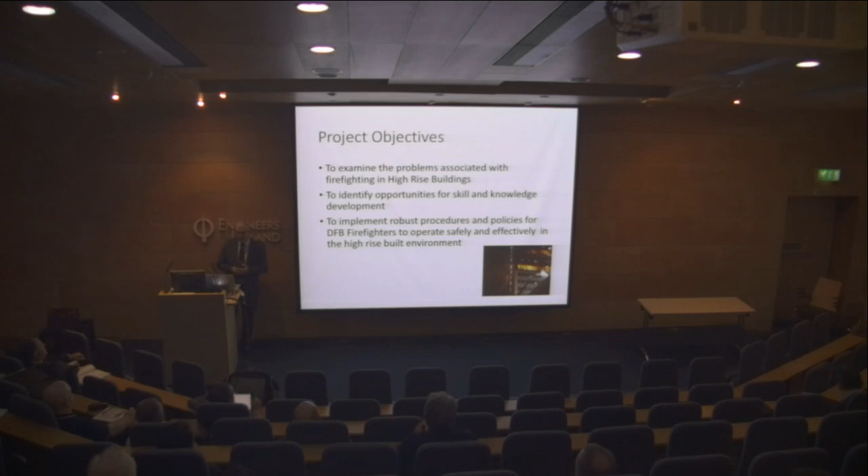So we wanted to examine the problems associated with firefighting in high-rise buildings. We also wanted to identify opportunities for skill and knowledge development amongst our crews. And then we wanted to implement robust procedures and policies for Dublin Fire Brigade firefighters to operate safely and effectively in the high-rise built environment.

So this has been very much a group effort, so I'm only one of many. And if you care to look at the list of names, you'll see some of your esteemed members. Niall is right there, who was a really big help to us. We've also got people from the community of smoke management, fire alarm systems.

So one of the first things we really realised was this had to be an eclectic mix of people to help generate the type of information we wanted. We really couldn't do it on our own. This has actually turned into 5 separate work streams looking at the emergent themes in more detail. So this was a really big project for us.

So really the start off point is captured in this quotation, in that the relevant question is not simply what we should do tomorrow, but rather what we will do today in order to get ready for tomorrow. Because the implications and findings of this project are going to influence Dublin Fire Brigade probably for the next 50 years. So it's that big a project to us.

So what did we do to get ready for tomorrow? Well, we defined what a high-rise building is. And when we drill down into that later, you'll notice that everybody really doesn't agree on what a high-rise building is. We also characterised the high-rise problem from the perspective of firefighters.

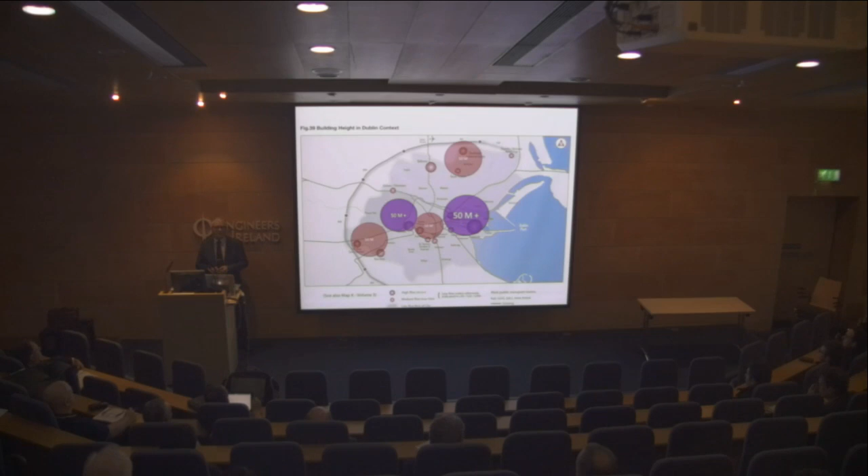Now, that's one perspective on a definition of high-rise. If you were to look from a fire service point of view, you will find something quite different. If you look at the British Generic Risk Assessment for high-rise buildings, they define it for the purpose of this assessment that a high-rise building is a building containing floors at such a height or position that the deployment of external firefighting equipment and rescue operations may not be feasible. So that was starting to give you an insight of how the fire service is looking at it in the UK.

If you go across the Atlantic, and we looked at every definition possible, the Ottawa Fire Service say that a high-rise structure is a structure that's beyond the reach of fire department aerial equipment because of its height and its setback and its location, which is a slight broadening of the way we understand it. They also define it as structures that require unreasonable evacuation times, structures that pose a potential for significant stack effect, which we're going to talk about later, and structures that require high-rise tactics.

So that's completely different to Dublin City Council's view, because the entire perspective of firefighting is what we can reach from the outside. So that's the principal metric applying internationally in the fire service community. So from that point of view, what can we reach? Well, our largest aerial appliance in Dublin right now is a 30-metre ladder, and its effective reach is 20 metres when you talk about the position that it has to take on the street. So from that position, 20 metres from our point of view becomes the standard that defines high-rise.

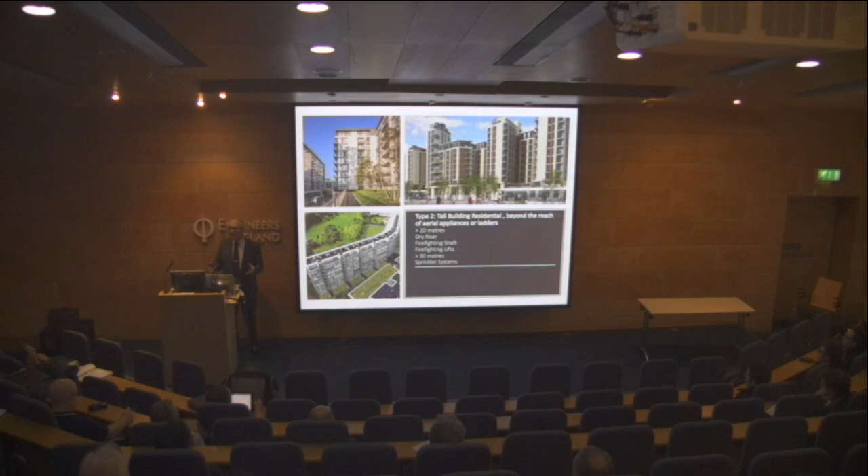The type 2 is buildings that are residential above the reach of our ladders. And then the type 3, we go to commercial or mixed developments that are above the reach of our ladders. And each of those will have a very clearly defined approach from a firefighting perspective.

So the next thing, I want to talk about the problem associated with high-rise firefighting. So the first one I'm going to touch on is fire behaviour in tall buildings. And you're going to hear me talk about tall buildings now rather than high-rise, because everyone has the vision in some countries that we don't have any.

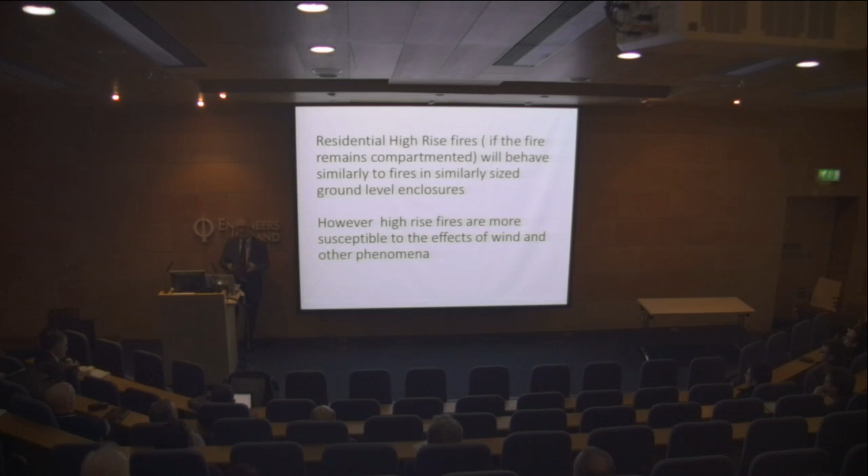But have a look, residential high-rise fires, if the fire remains compartmented, will behave similarly to fires in ground level enclosures, with one caveat. The effects of wind are actually going to create a whole different environment for our people. So have a look. A wind-driven event requires an inlet and an outlet. And if the firefighters are caught between the two, they're in a severely dangerous situation.

So if you want to take a look at this fire here in Dublin, this would be a type 1 high-rise. It's clear to see which direction the wind is coming from. From your perspective, it's going from right to left. You don't have much sound, but we'll work on that.

What I'd like you to watch is when you hear the pump sound change. What I'd like you to listen to is when the high-pitched whine of a pump goes down. We had a failure of the pump, and I want you to notice the change in fire behaviour. First of all, the smoke colour changes, and when we start to see flame propagation at the window, you're going to see an unusual effect.

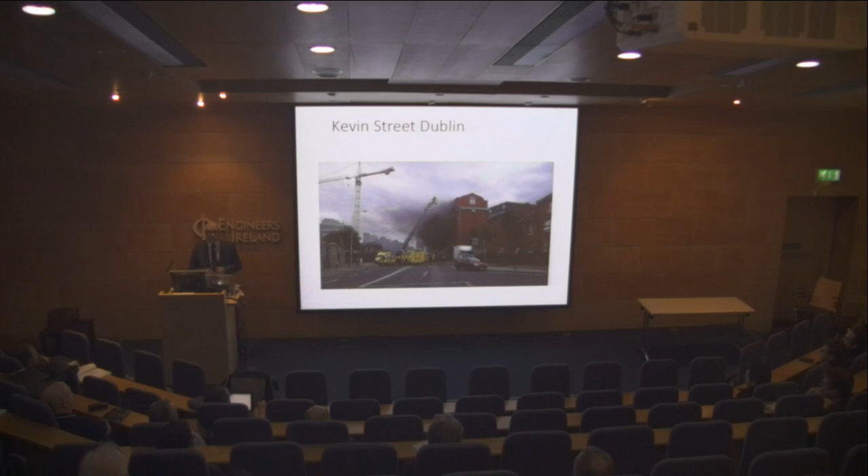The flame does not demonstrate typical Coanda effect against the building. You see a horizontal flame coming out. Can everybody see that? You are seeing a wind-driven event. What I want to show you in terms of the firefighter's point of view is what we have here. We had an inlet, in this case it was an AOV, and we have an outlet, and you can see the position of the firefighters.

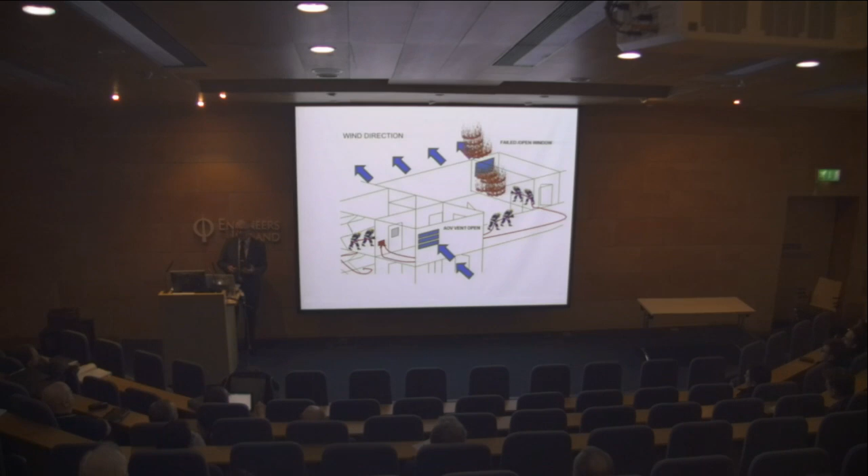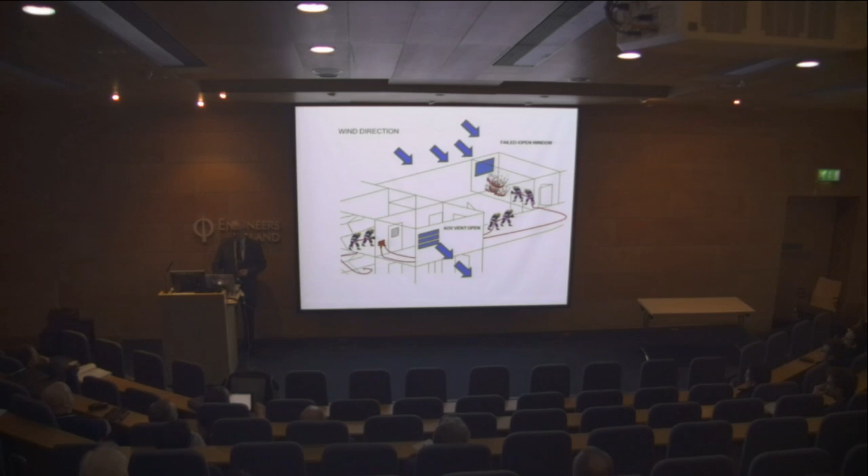When we introduce the effects of wind, we get that effect. So you've just witnessed that. Those guys were extremely lucky on that day because the wind direction was acting in a favourable manner towards the fire. Now, if you have wind coming from the opposite direction, like that, the inlet and the outlet actually reverse, and the firefighters caught in the middle end up with something like that. And from the inside of the fire, that's what they would encounter.

Wind-driven fires are extremely dangerous to firefighters, but the point I'm trying to make at this stage is they require an inlet and an outlet. So when we talk about AOVs later, we can see how the AOV, although it has use from the point of view of evacuation of people, the actual smoke management system can pose a significant risk to firefighters. So, the hazards associated with wind-driven events or ventilation flow paths can be intensified by smoke control systems. Now I want to move to fire behaviour in large enclosures.

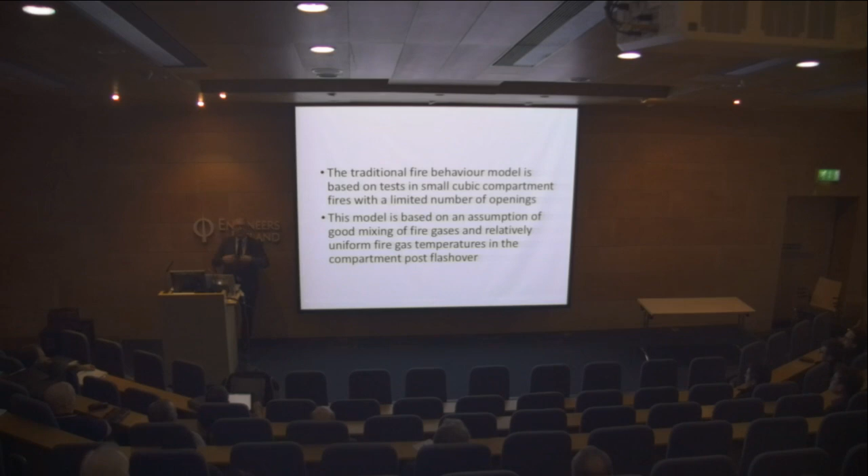Compartment fire behaviour models that we all use are conceived using small-scale tests. The traditional fire behaviour model is based on tests in small cubic compartment fires with limited numbers of openings. This model is based on an assumption of good mixing of fire gases and relatively uniform fire gas temperatures in the compartment post-flashover. You guys use that in your modelling. We use it in the training of firefighters.

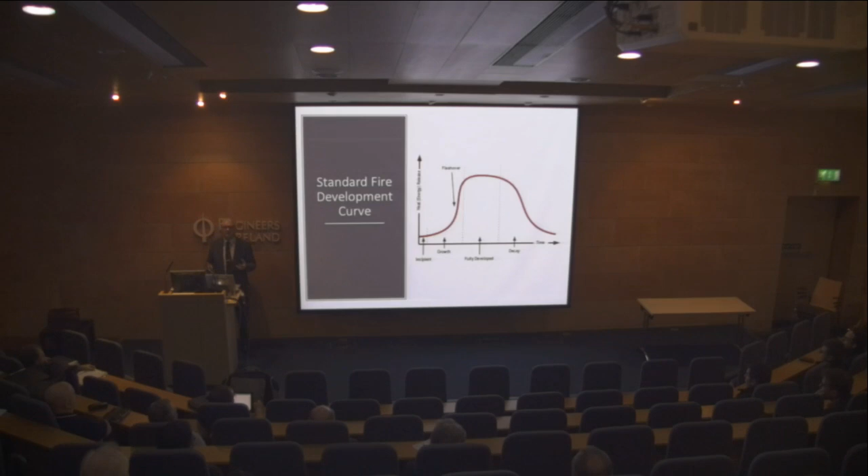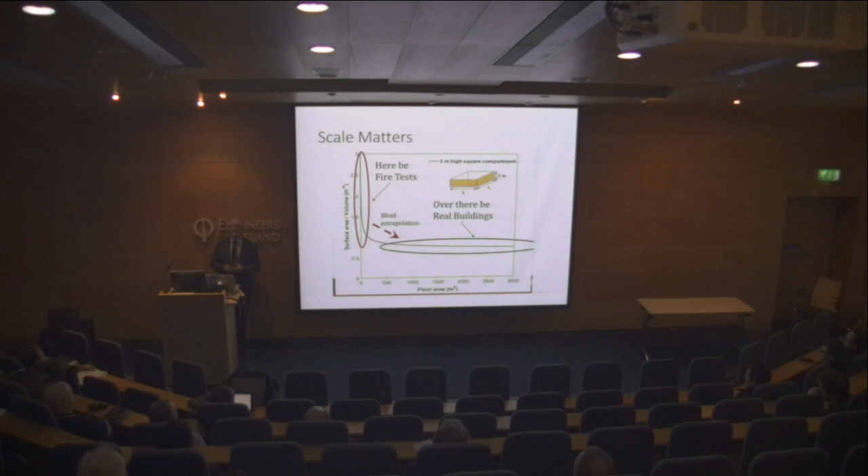And we really represent fire using the standard fire development curve when we talk about the ignition, the growth phase, the flashover period, the fully developed fire and the decay period. But the reality of it is small cubic fire behaviour has little or no relationship to real fires in large volume enclosures. So if you take a look at where the fire tests are and where the real buildings are and the real fire behaviour in those buildings, an awful lot of the assumptions made are blind extrapolations. They're not actually based on real tests.

So the other factor is the huge change in the contents of modern buildings, with a preponderance of polyurethane foam, plastics and other materials based on hydrocarbon products, where it's been demonstrated reliably by Underwriters Laboratories that modern fires burn 10 times hotter and 5 times faster, up to the point of ventilation control.

So the actual fire behaviour in large enclosures follows a different pattern entirely. They don't burn simultaneously throughout the entire enclosure. They tend to burn over a limited area at one time, preheating the next area. These fires tend to burn across floor plates, towards openings, and vertically between floors. And this type of fire development has been labelled travelling fires or progressive fires.

To give it some context, when we look at fires in high-rise buildings, we start to see this type of eventuality, and here's the reality. Travelling fires have the potential to spread at 22 square metres per minute. That's the equivalent of one room every 30 seconds. This does not fit the model that is commonly used in engineering assumptions. This does not fit the model that we currently teach firefighters about fire behaviour.

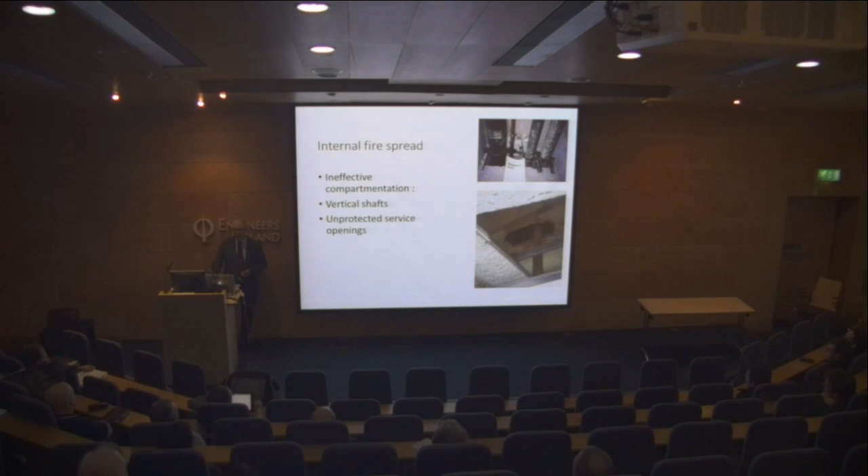So I want to now talk about fire spread in tall buildings. So the first thing would be pretty conventional and pretty much what we would be used to when we look at ineffective compartmentation, vertical shafts, unprotected service openings, ductways, faulty fire doors and so on. But we now have to introduce the potential for external fire spread with high-rise. So now we're looking at combustible window sets, including combustible transoms.

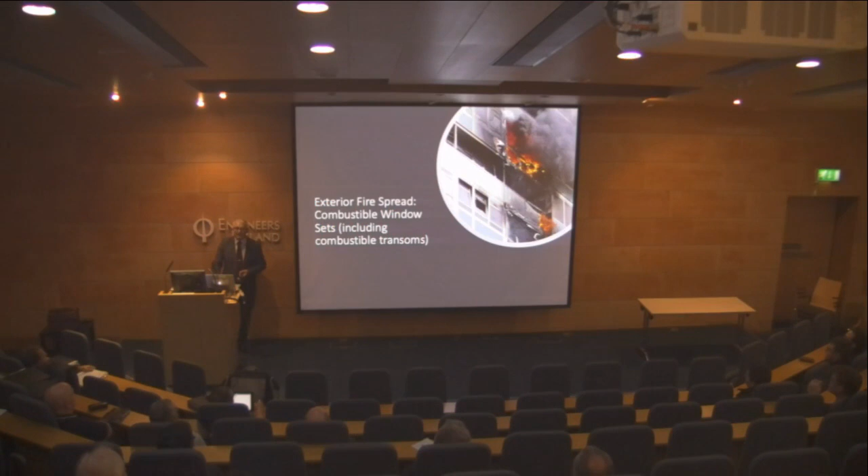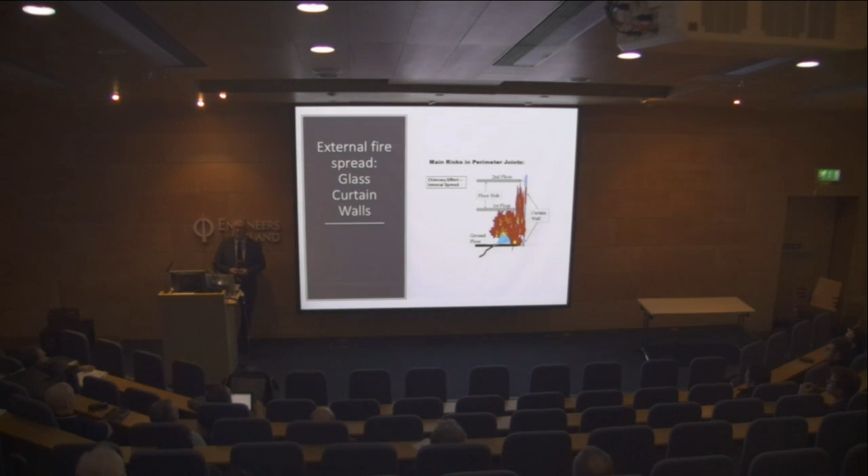We're now looking at external ACM or MCM wall cladding, rain screen over insulation. We're now looking at external rendered wall systems over insulation. We're also looking at curtain walls with particular attention to perimeter joints. And then one that's very common nowadays is when we have high hazard balcony storage. And there's a whole micro industry starting in this country with people making the balcony a living space for barbecues, for a lounge area, for sun tanning areas and all this.

So the next thing I want to talk about is air and smoke movement in tall buildings. Well, the principal understanding is the phrase stack effect, and we have a winter stack and a summer stack, essentially causing smoke to behave totally out of the ordinary from what we would normally expect, going up. And it's all to do with the relative heat between the interior and the exterior.

So in a high-rise building, particularly in a summer situation, fire can go down, it can go left or right, and we can have a situation in areas that we would normally classify as the risk zones, the primary and secondary zones for evacuation, that the smoke may not be rising. So the primary risk zone for evacuation may not be where we normally would anticipate it to be, above the fire and the fire floor, of course.

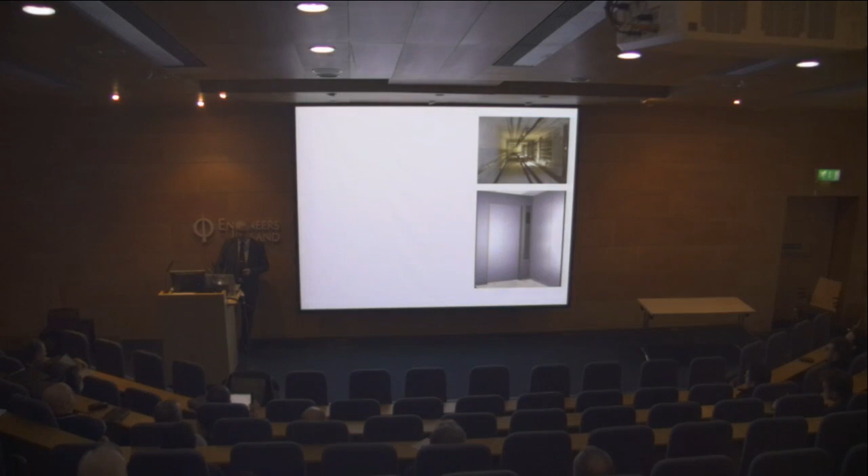So the next thing I want to talk about is lifts and the piston effects of lifts and the effect that has on smoke movement, effectively giant pumps. Have a look.

We gotta get out of the building.

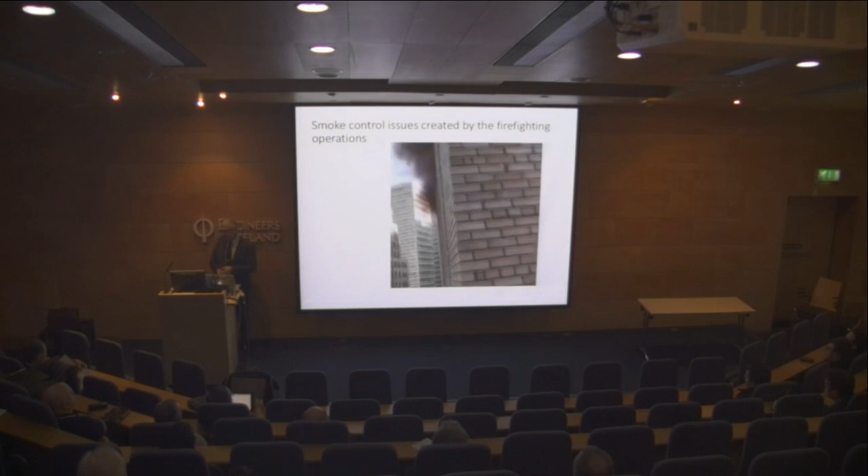Lord, protect my staff.

I had to edit that because this prayer soon turned to very strong criticisms of what was going on outside. But the message here is the smoke control issues that are created by our actions. The actions of forcing doors, the actions of simply working from protected stairwells to get onto corridors. And one of the biggest findings we found is the actions of firefighters could be creating the biggest danger for occupants. So this is particularly topical, as you know, in Grenfell, and I'm not going to talk too much about Grenfell, but actually managing the smoke that we create suddenly became a much higher priority than we even anticipated ourselves.

So I want to talk about some other operational challenges, if I may. With regard to high-rise buildings, the height creates problems for us. Access, first of all, to floor levels above the height of our aerial equipment means that we have to go in. Now, if you look at the current model of command and control, we talk about offensive operations and defensive operations, basically based on a framework of how we analyse risk to the firefighter.

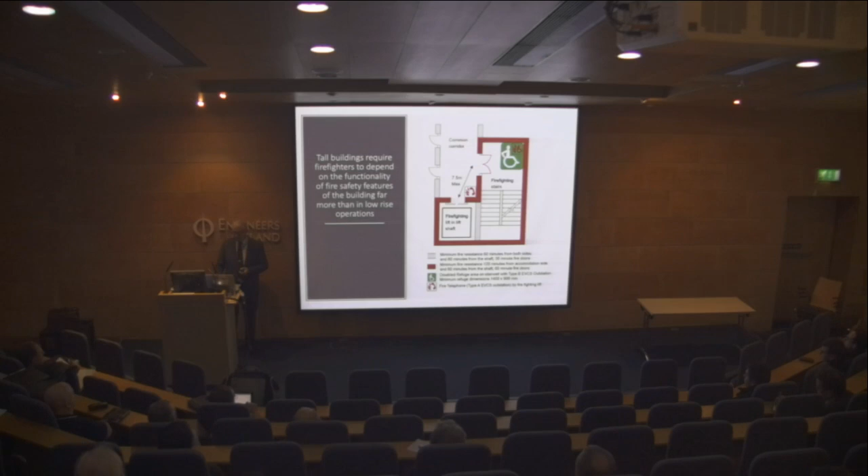Again, if I could give an example, every piece of equipment on a fire engine is checked twice a day, 365 days a year. We're now going to a building that may not have been inspected, it may not have been maintained for much longer than that. And the reliance that we have on the building systems is huge compared to low-rise. So if you look, our ability to control a fire is heavily dependent on the standard of construction and the fire safety management of the building.

And I don't know whether you guys recognise that. That was Lakanal House in London. If you look where the fire originated on the lower floor and look where it's spread to, you don't need to be a fire engineer to understand there's problems with compartmentation. The next thing I want to talk about is dry and wet riser systems. Basically, there's two standards in the Irish environment, BS 5306 and BS 9990.

Depending on which standard, the maximum static pressure is either 10 bar or 12 bar. The wet rising systems are pressure regulated to 5 or 8 bar on each floor. And here's the rub. These systems actually limit our capability to fight the fire. They don't actually help us as much as we want them to.

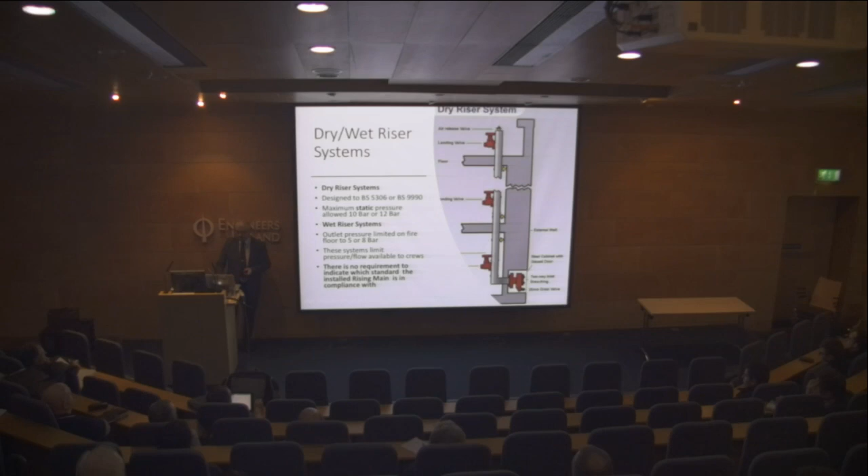Well, why is that? Well, first of all, there's no requirement in Irish regulations to actually specify which standard has been installed. So we don't know. The next thing is that our standard firefighting techniques, which were developed in Sweden in the 80s and transferred over here, that left us at the leading edge of firefighting tactics and techniques, we can no longer use.

So the picture you're seeing there is a firefighter suspending small droplets in the air. In a fire gas-filled environment, it's a hugely efficient way of stealing heat from a smoke layer. It's a hugely efficient way of maximising firefighter safety. We can't do it anymore. We have to go back to old technology because of the design of dry risers.

So the next thing I want to talk about, dry and wet rising mains. Sorry, can you explain that? Why? Is it the pressure? It's a combination of flow and pressure. A fog nozzle needs 7 bar at the inlet to generate the small droplets that are demonstrated.

We cannot achieve those pressures when we take into account the height and the friction loss in our hose, because the distance allowable is 60 metres from the dry riser or wet riser outlet, which means that could be 3 lengths of hose. So when we add in the head pressure loss, the height-related loss, the distance and the friction loss in the hose, we are operating at pressures between 3.5 and 4 bar.

So we cannot use the fog nozzle because there isn't a design in the world that will operate effectively below 7 bar. So we've had to abandon the best firefighting techniques in the world because of this. So, dry and wet rising mains: the ratio for flow area is 1 to 900 square metres. The flow rate achievable from a wet rising main is 1500 litres per minute. The flow rate from a dry rising main is not specified.

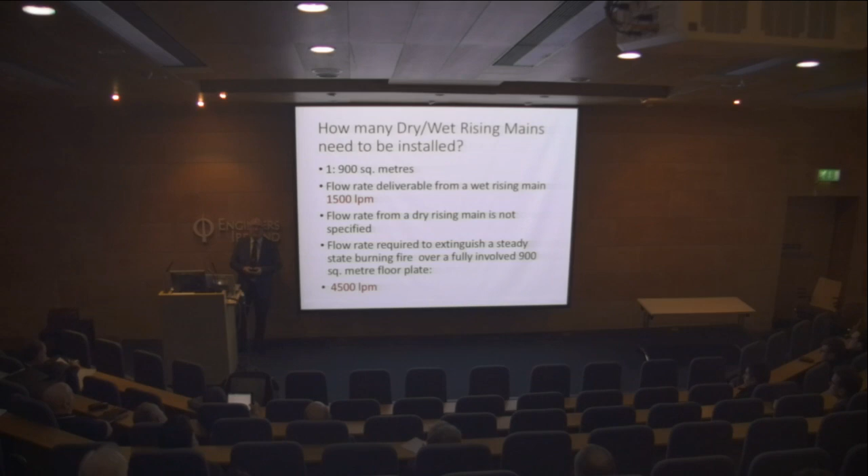The next thing I want to talk about, if I may, is smoke control systems and AOVs. Again, they really originated from the Fire Department in New York, where they used to remove the scuttle above a public stairwell to remove smoke. And this has been mechanised and refined with regard to its size in Europe, right? Have a look at a fire we attended recently. Every single AOV is open. They're only supposed to open on the fire floor.

Please throw your mind back to the concept of wind-driven fires, of ventilation flow paths, the concept of an inlet and an outlet required to create a really dangerous event for firefighters, and now look at what we're facing. We have spoken very carefully with smoke management system companies, and this flaw of multiple floors opening, we've been assured, is going to happen in 90% of the dwellings out there because of inappropriate programming. Have a look at each of the AOVs.

So if I may, I'd like to talk about the guidance documents. I'm going to really only touch on one aspect of this, which is pretty topical at the moment. So we're looking at TGD B. We're going to look at BS 9991 and effectively how it affects one aspect of our firefighting, which is really kind of controversial at the moment. Stay put.

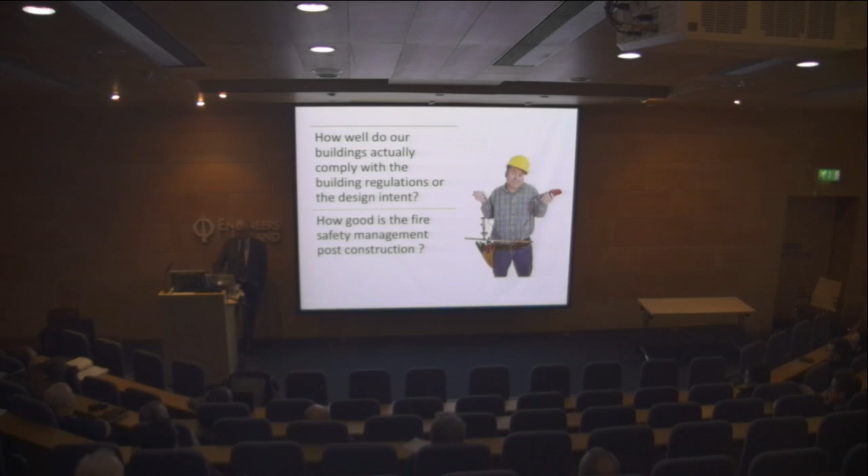So let's look at the challenges that we have. When we put it all together, we realise that we have concerns about the stay in situ design strategy, which is quite popular discussion in the UK right now amongst the fire services. The stay in situ design strategy, as opposed to a firefighting strategy, has served them very well for 30 years until events in the last 2 years. To such a degree now they're really questioning it quite hard, as do we.

We have issues with smoke control systems on the assumptions that they're installed under with regard to the amount of smoke that they're supposed to deal with, with regard to the actual amount of smoke that's going to happen. We have issues with the dry and wet riser systems in terms of the flow that they can give us and the pressure they can give us. We have concerns because of our knowledge or operational understanding of the level of fire safety management in the buildings that have been built, and we have concerns about compartmentation.

So what are we going to do about it? It's easy peasy, isn't it, really? So we've looked at this really hard, and the first thing we did is we took a really strong and hard look at ourselves. So the first thing we did, we spoke to our international colleagues. We spoke to our British counterparts, our American counterparts, and we tried to understand what they had gleaned from real-world experience. We carried out a literature review of international best practices. We studied every standard operational guideline that we could lay our hands on. We looked for convergent themes. We looked for the themes that went different directions. And then we looked for emergent themes to see what the future will hold.

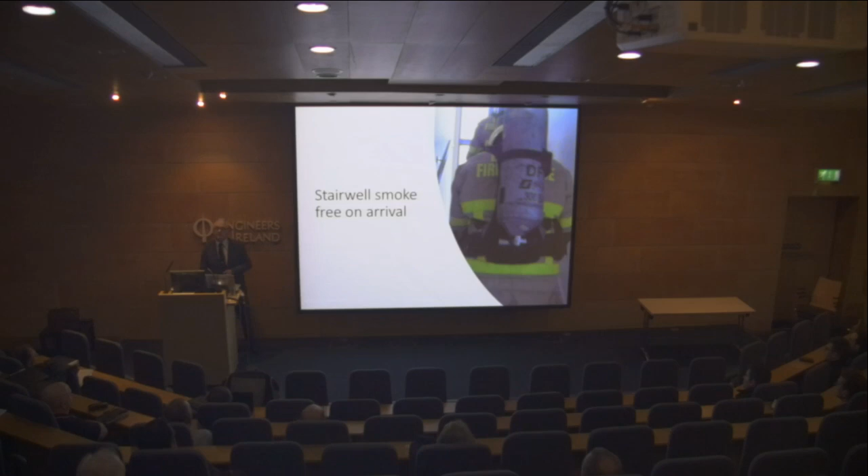So this is what we came up with for residential buildings. The first planning scenario was smoke-filled stairwells. Think about that for a minute. Have any of you guys considered that? We then thought about the stairwell might be clear. The AOV may actually work. It may not be nailed closed. They may not be disconnected. They may have been serviced recently. The residents in that apartment block have paid their management fee to allow the management company to service these items.

Next one, we looked at the apartment or the attack corridor is smoke free, and then we looked at the opposite, that the corridor might be filled with smoke and people can't escape. We then looked at a multi-apartment, multi-floor structural fire. We actually had one in reality, as you know. We then looked at some commercial building scenarios, and we thought about travelling fire or a progressive fire in a single floor commercial building. Then we looked at a multi-floor commercial fire. We then looked at wind-driven effects, and then we looked at underground car park fires.

So then what did we do? Well, we came up with some key principles, and these key principles are going to be the bedrock of how we're going to approach this for the next 40 years. We determined operational intelligence driving evidence-based decisions and practice. We determined that a rapid intervention and effective water application is the only way forward. We need to do this really, really quickly. And we want to be the fastest fire service in the world at getting water on high-rise fires. Not the second fastest, we want to be the best.

We then came up with this stay in situ. No. We've determined that it is not the best action for Dublin Fire Brigade at this current time. And we believe that the only option available to us logically is the concept of simultaneous fire attack and phased evacuation based on a risk profile of a primary risk zone and secondary risk zones I'll talk about in a minute. So we also identified development opportunities.

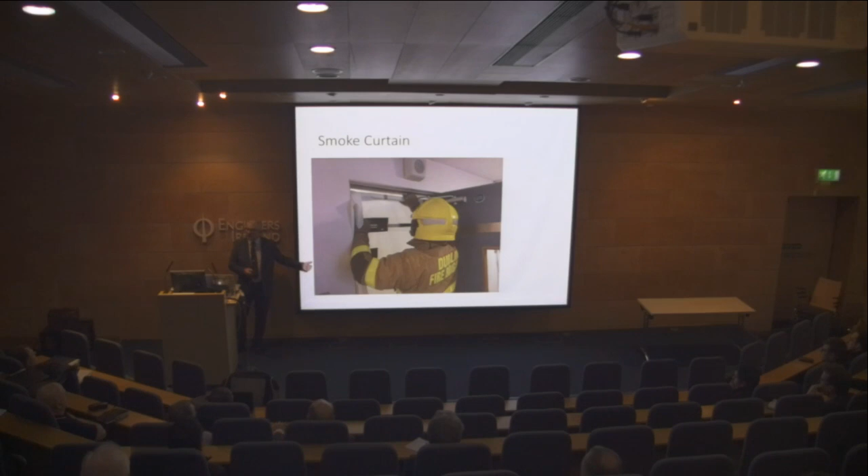Throw your mind back to the video of New York, that as soon as they open the door by forcible entry, that escape route is gone. It's finished. Whereas with this simple technology, which has been in Germany for 10 years, it's on every single fire truck in Germany. The insurance industry paid for 50% of them because of the savings in actuarial losses. It works. So, let's have a look at one use of it.

This is a hospice fire in Dublin, 2017. And if you look at the room of origin, from both inside and outside, this is the corridor for escape. So we can see that people could still leave while we're fighting fires. That is a really significant development for the fire service.

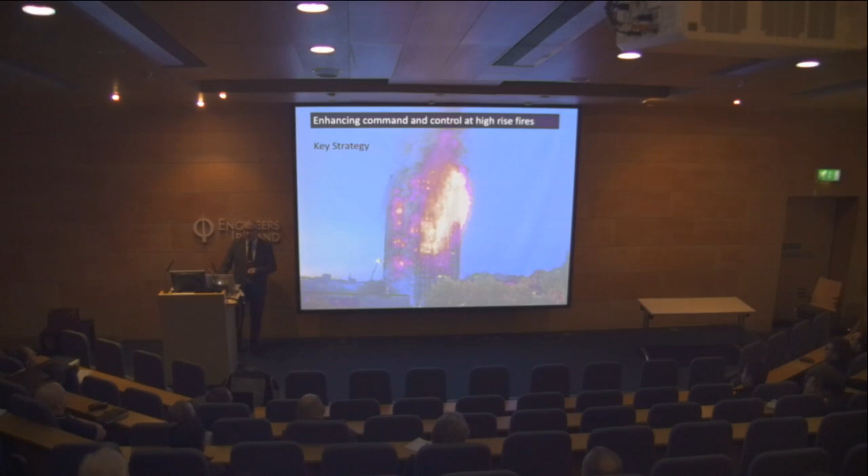Okay, the next thing with regard to enhancing our command and control strategies, the concept of a simultaneous fire attack and phased evacuation is going to be a cornerstone of our approach here in Dublin. We will not be depending on stay in situ. How are we going to do that? Well, we're going to use the smoke curtain, but we're also going to evacuate a primary and then secondary risk zone.

So the primary risk zone, we will simultaneously mount a fire attack on the fire floor in that apartment and evacuate all apartments adjoining on that floor. We'll also make sure that the stairwell remains clear. For the most part, that will be most fires we attend. If the fire has developed hugely, we will then consider secondary risk zones depending on stack effect. So it won't always be the floor above, it depends on the smoke travel. But the next floor will be the secondary risk zone and so on.

With regard to decision support, if any of you have been following the Grenfell inquiry, particularly at the early stages, the first arriving officers, you will actually experience the sheer stress that arriving officers experience at multi-casualty incidents. It's hard to explain unless you've actually experienced it. What we've done is we've looked to our colleagues in the UK and Kent Fire and Rescue who've come up with a heuristic or a decision support matrix, if you want, called the RICE model.

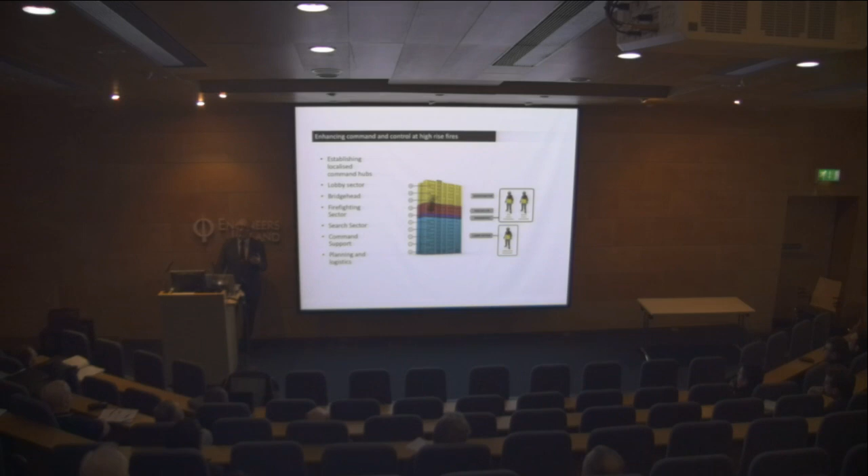The next thing with regard to command and control, we've looked at best practice, and we now establish localised command hubs, both in the lobby, the bridgehead, in a firefighting or search sector, command support, and in planning and logistics. Predetermined roles in the command structure, predetermined positions in the building, actually cuts down on reflex time and improves firefighter efficiency. Have a look.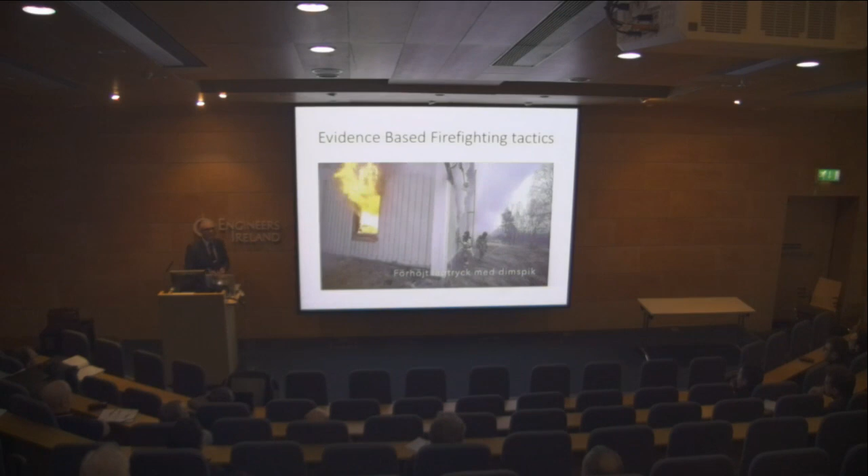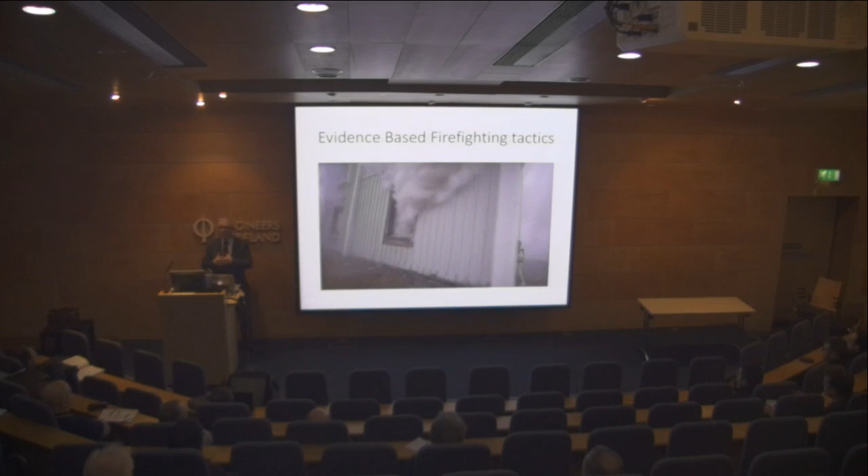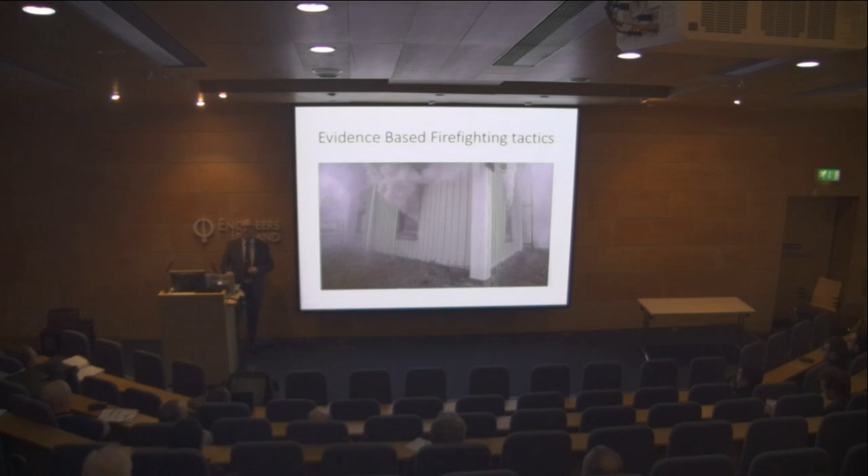This is a piece of equipment developed in Sweden at 70 litres of water a minute. Given that most of our tall buildings will be type 1s, our turntable ladders will be able to apply this by using an electric drill. And because of its design, and that it will be an exterior water supply and pressure, we can generate pressures of up to 40 bar and generate droplets less than 0.3 of a millimetre, and it gives incredible efficiencies. So we can actually start our firefighting operations from outside.

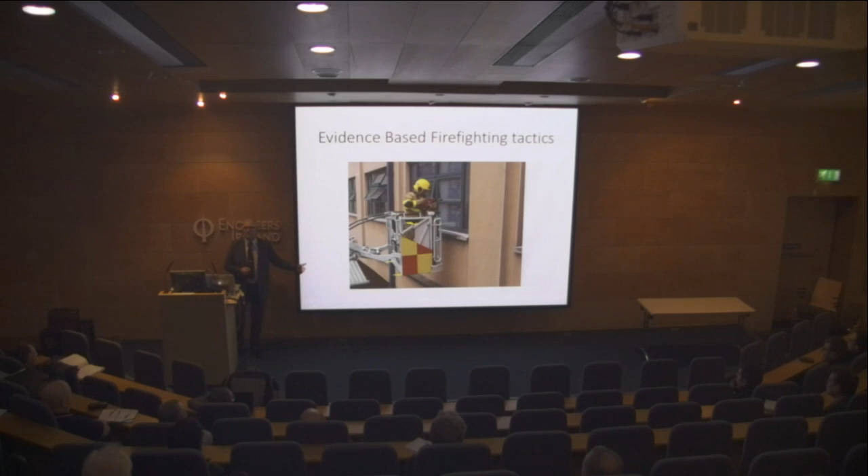Our intent is to expand the performance envelope of our aerial equipment, which are normally heavy hitting equipment when the roof is gone, to exterior firefighting while the guys are trying to get up the stairs with 45 kilos of equipment. So we're going to reduce reflex time. Have a look at this technique.

Straight stream tactics from outside at a very high angle produce a surfing effect. Have a look at the effectiveness within 7 to 8 seconds of fighting the fire. This came from Underwriters Laboratories. You might say, sure, haven't you been putting water on fires for years? The very specific, very high angle with a straight stream only keeps the vent working. It allows it to let steam out, and it has a fantastic cooling effect. Again, if the window's broken, our turntable ladder can be doing that while the guys are actually on the way up. That might seem a fairly trivial thing until you realise the historical methodologies that we've been using for years.

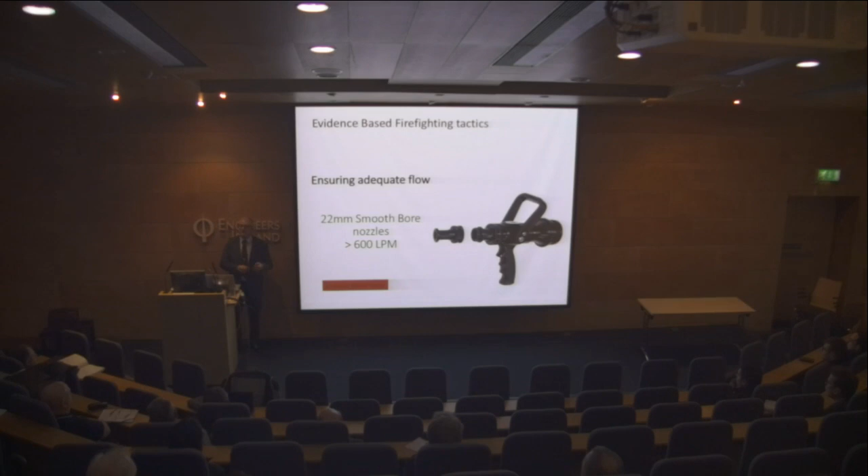The next thing, the problem with dry risers. We've had to return to technology that goes back hundreds of years. Simply a pipe, a smooth bore. We've generated a lot of thought, a lot of learning development, how we can maximise. But given the nature of current dry risers, we've had to go backwards to go forwards, if you excuse the cliche.

The next thing we're looking at, and we've actually bought, is a floor below nozzle. There will be occasions that the highest turntable ladder in the world cannot reach a certain building because of its height, setback and location. The floor below nozzle will allow firefighters to actually attack fires on a fire floor when conditions are untenable, maybe because of wind-driven effects, maybe because of a failure of compartmentation. This will really fit into a scenario where we can accommodate a firefighting action even if our turntable ladders will not fit.

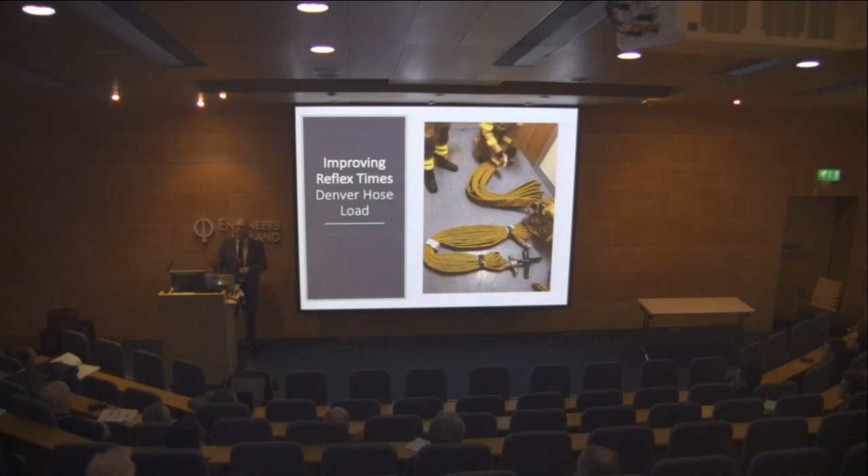The next thing we did, if you look at a standard hose in Ireland, it's in a roll, and you see firefighters rolling it out. It doesn't work in high rise. It doesn't work in stairwells. So we looked at 4 different systems: a bag system from Australia, a bag system from Canada. We looked at a thing called a Cleveland load from the United States, which didn't work at low pressures, and we came up with this type of hose load. It works extremely well in narrow corridors.

The next thing we did was standardised high-rise packs. We don't want people going down for pieces of equipment that they may need later on. So each crew will carry a dedicated range of equipment, and the load will be distributed equally between every member. We literally weighed the guys and the equipment going on to ensure we could get the best ergonomics and the best load distribution.

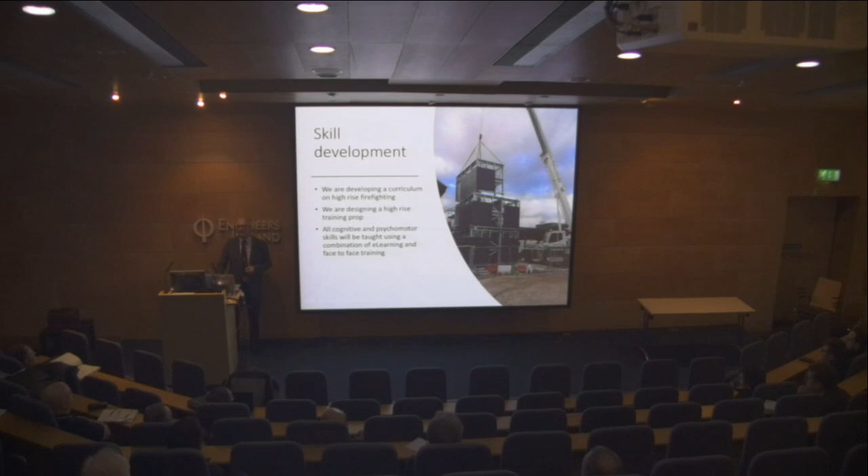The next thing we have to do is we've actually developed a draft curriculum of high-rise firefighting on all aspects, cognitive and psychomotor. We are in the process of designing a high-rise training prop. All cognitive and psychomotor skills will be taught using a combination of e-learning and face-to-face training. So just to summarise, and I know you just need the main ideas here.

The current city planning documents confirm a policy to consolidate and expand the city through high-rise development. It's going to happen. We've got a clear understanding in Dublin Fire Brigade of the challenges that present for firefighting in tall buildings. We've identified development opportunities for improving our operations in the modern built environment.

And I'd really like to finish by summarising a comment by Peter Senge, and he says, through learning we create ourselves. Through learning we become able to do something that we were never able to do. They talk about learning organisations, usually in the context of commercial competition. The nature of the fire service means we're constantly changing. We are constantly reacting to the built environment and the changes in it.

I just want to assure you that we know we're not there yet, but I can also assure you we're absolutely determined we're going to get there and provide the best service for the citizens of Dublin. Thank you so much.